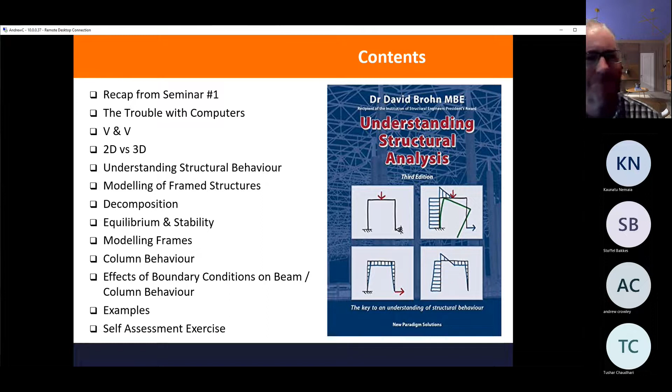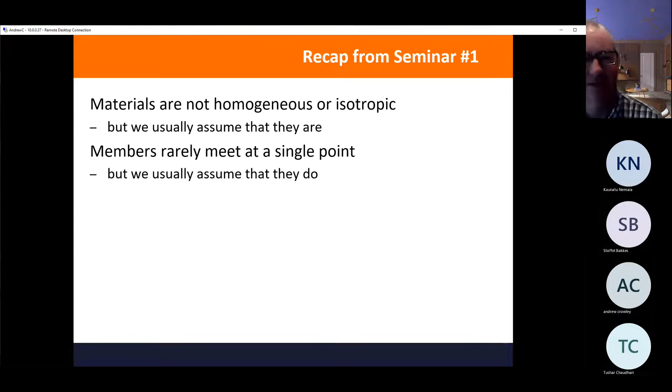So, reminder of seminar number 1. Don't forget that materials are not homogeneous nor isotropic, but we usually assume that they are. Members rarely meet at a single point, but we usually assume that they do, particularly for analysis purposes. Loads rarely apply uniformly, but we usually assume that they do.

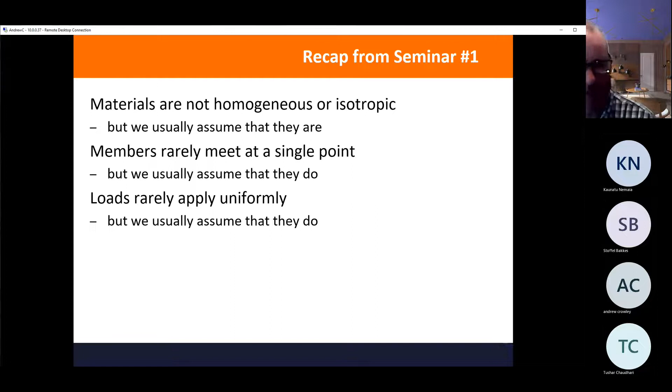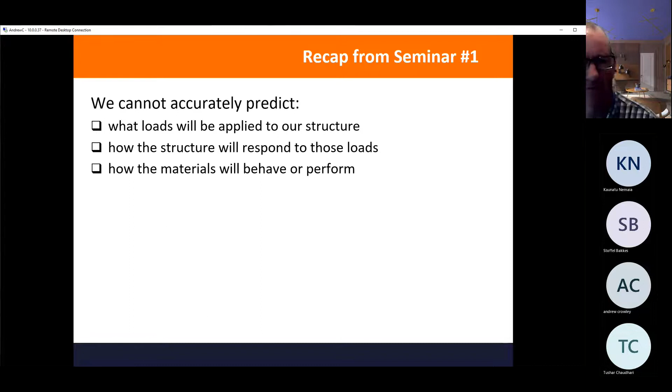So we cannot predict with any real accuracy what loads are going to be applied to our structure, how the structure will respond to those loads, how the materials will behave or perform. So we use a simplified representation, i.e. a model, for analysis and design.

So when we're doing structural assessments on existing buildings, engineering judgment plays an even bigger role than in new design, because half the time you don't know what you've got and you don't know what you're dealing with. You've got to make some judgment, some, shall we say, assumptions.

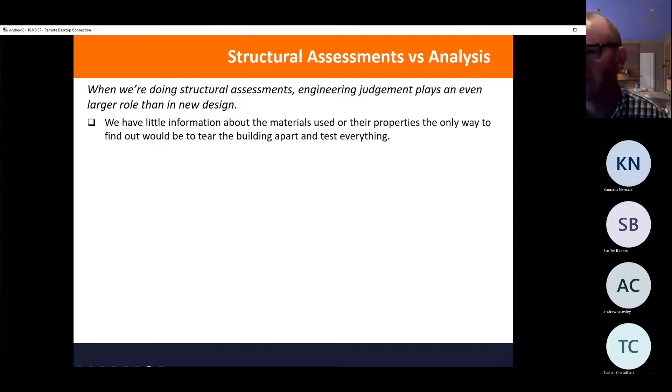So usually when you're looking at an existing building, and we'll get into this in a future lecture, we have little information about the material properties that we used. So we may have to test the material properties, and it's quite difficult to tear the building apart once it's been built.

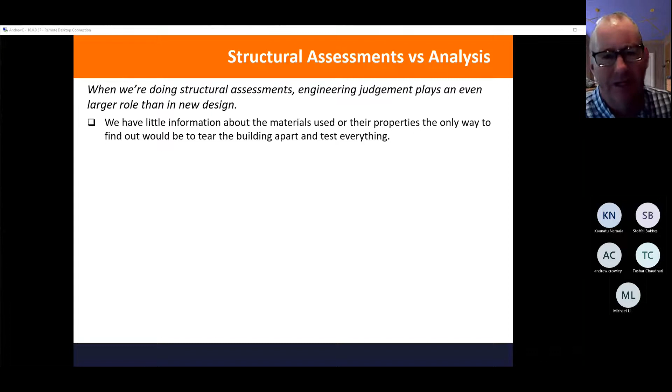So different engineers will come up with different solutions depending on their approach. As a rule, if one approach gives twice the capacity of the other, one of those approaches might be wrong. Now, generally, engineers err on the side of caution and normally take a conservative approach, especially when it comes to existing buildings. So that's where the deviation may come. But if there's a massive difference, an order of magnitude difference, then there's something incorrect in one of their approaches to the assessment.

So it's not an exact science, especially seismic assessments. But the trouble is, all those magic numbers make those analyses look scientific. So even response spectrum and time history analysis, they're all approximations and they use simplifying assumptions.

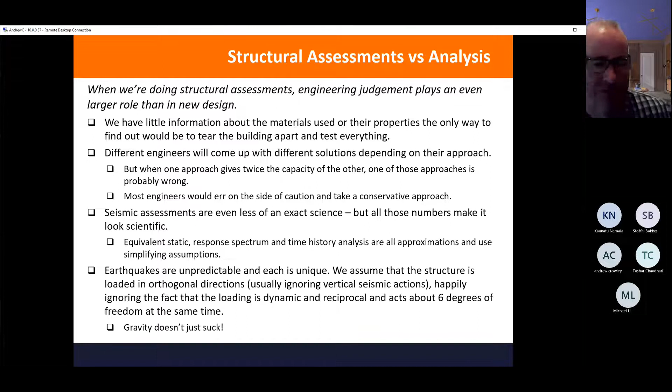And don't forget that earthquakes are unpredictable and each earthquake is unique. We assume that the structure is loaded in an orthogonal direction, usually ignoring the vertical seismic actions, happily ignoring the fact that the load is dynamic and it's reciprocal and acts about 6 degrees of freedom at the same time. So it's a bit like gravity acting in six directions at once, and that gets very complicated and variable.

So what's wrong with computers? Well, the trouble is the people using the computer don't necessarily have enough structural engineering knowledge to carry out the task they've been given. It's often a graduate who's plonked straight onto a computer with a piece of software they don't really know much about, to assess a task they don't really know much about.

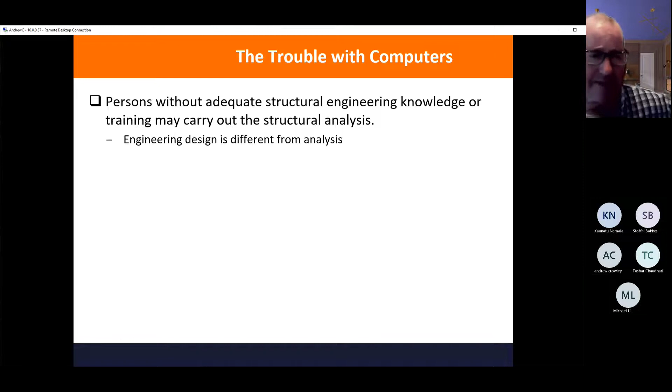So don't forget, engineering design is very different from analysis. The other downside of computers is there could be quite a difference between what the originator of the program intended and what the designer who's using the program is actually trying to do.

So always keep in mind, are you analyzing the right thing? Is the program being used out of context or beyond its scope? Don't forget, every piece of software has scope, and it has limitations to its scope. And sometimes some of them will not tell you that it's being used out of scope. The good ones will.

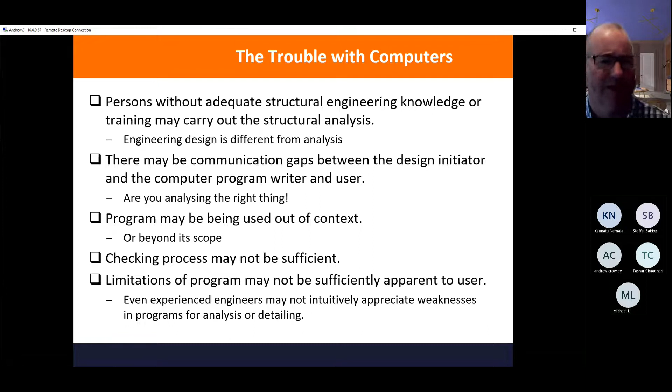And the checking process is very difficult. Sometimes when you're presented with a whole pile of computer output, it's very difficult to tell whether it's actually correct or not, and it's not obvious for a user, even an experienced user. They may not see the weaknesses in that program. And believe me, every computer software will have weaknesses in the analysis, in the way it's been programmed, and the way information is contained, processed, and represented as analysis results.

So I'm going to borrow from David Braun again. He stood up at an international conference, being the man he is, and said what engineers really need is a crap detector. So when you're presented with a whole heap of output from a computer, you've always got to be able to look at it and go, no, that's a load of crap.

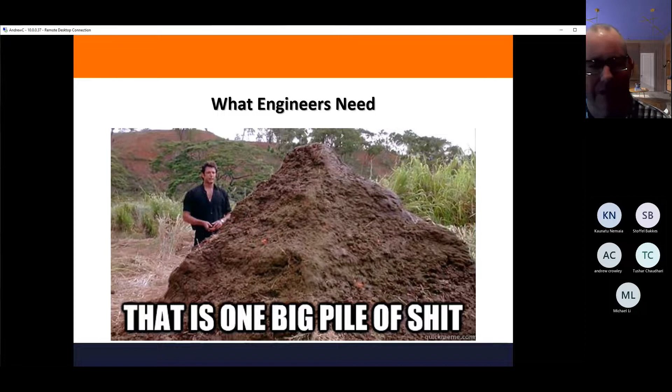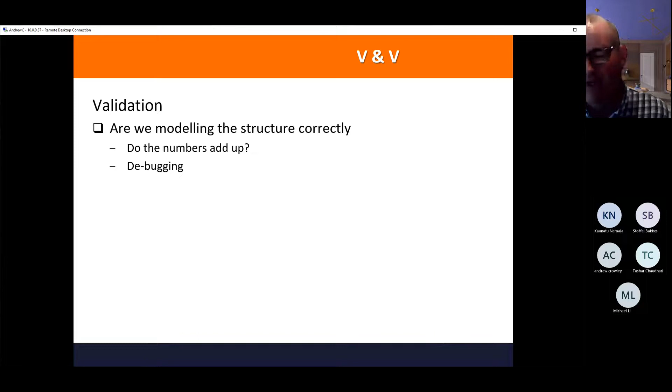And there's two sides of this computer thing. One is validation - are we modeling the structure correctly? Do the numbers add up? Has it been debugged properly? And then the other side is verification - are we modeling the correct structure? Are the nodes and elements used in the analysis really representative of the connections and members in the structure? Are the restraints representative of the real boundary conditions?

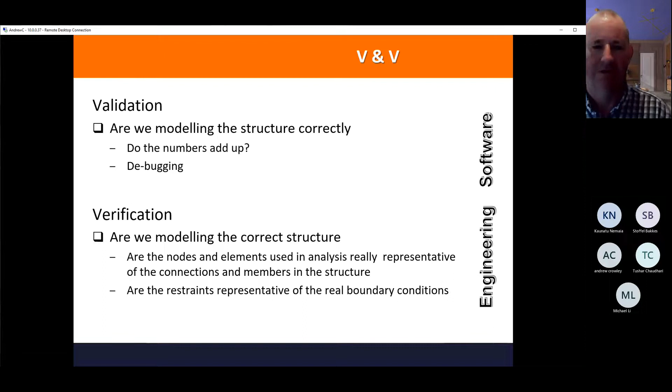So we'll come on to that. There's imaginary boundary conditions, and there's real boundary conditions, and then there's what we analyze and represent in the computer. So the validation part is down to the software engineer, but the other half is really down to the structural engineer in this case.

A little word about two-dimensional analysis versus three-dimensional analysis. Now, an awful lot of frames, particularly ones we're dealing with on a day-to-day basis, could be adequately analyzed in 2 dimensions, based on the simple concept that most buildings are rectangular. So the obvious advantage is that 2D modeling is much simpler than 3D modeling, much quicker to generate your model, and much easier to interpret the results.

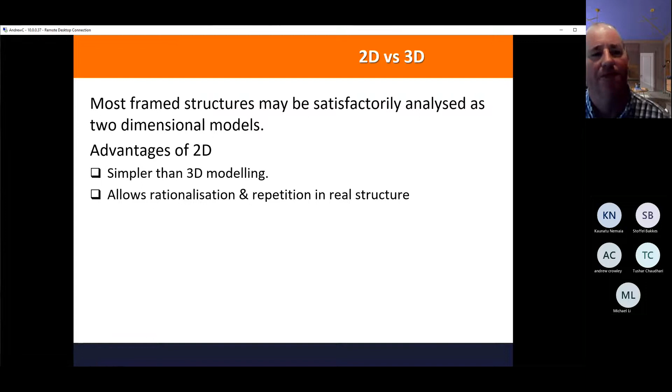It allows rationalization and repetition in the real structure. So if you are simplifying a structure, you can repeat it and repeat it again, and that's where economy comes into your building. It also means that you have economy in your design process.

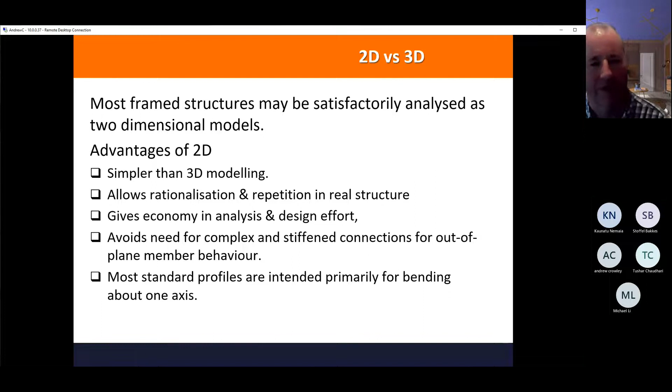Yeah, don't forget about out-of-plane behavior. So if you're analyzing your two-dimensional portal frame, it also needs to be restrained out of plane. And then if you suddenly model it in 3 dimensions, you'll find there are torsional effects you've forgotten about, and out-of-plane behavior that you've forgotten about as well. Most standard profiles, particularly steel profiles, are intended primarily for bending about one axis. So an I-beam is designed to be a floor beam - it's an I shape, and it's primarily designed to be bent about its major axis.

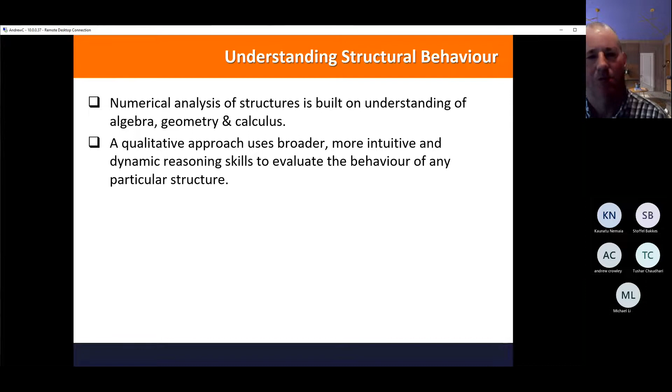So we come on to understanding structural behavior. It goes back to geometry, calculus, and algebra, if you remember all that. A qualitative approach uses a much broader, more intuitive, and dynamic reasoning to evaluate the behavior of any particular structure. So what are the key principles in understanding this?

Well, you need to consider the deformed shape of the structure - how is it going to behave under load? To reduce complex structures into statically determinate simple structures, from which the true structure may be rebuilt. You're probably aware that statically indeterminate structures are actually quite difficult to understand, and doing numerical methods by hand for statically indeterminate structures is long and laborious. The advance of computers means it's relatively quick and simple these days.

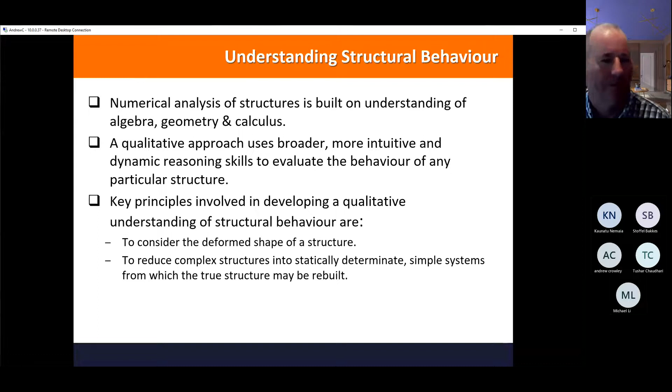But once you've got the output from the computer, you need to know what it really means. So one aspect is consider the structural form, particularly in two directions at least. What are the primary structural elements? How do you put the main frame together? These are going to be transferring the horizontal and vertical loads to the foundations.

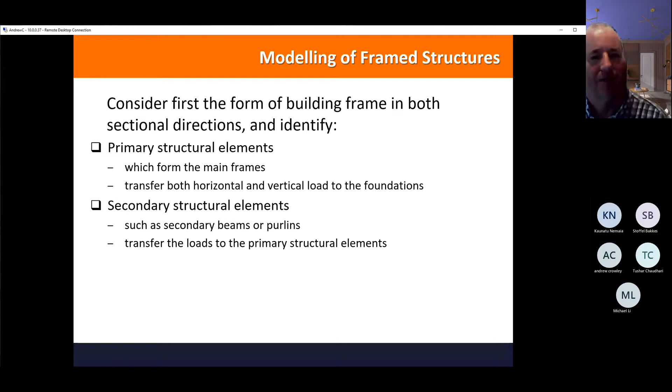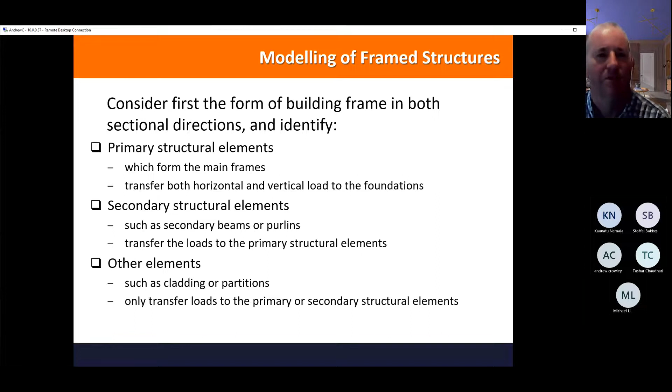But those primary structural elements carry secondary structural elements, such as secondary beams and purlins, girts, cladding, and so on. They transfer the load from the outside to those primary structural elements. Then there's other elements such as the cladding itself and partitions, and those are really only transferring loads to the primary and secondary structural elements as well. So this is where you begin to decompose the structure.

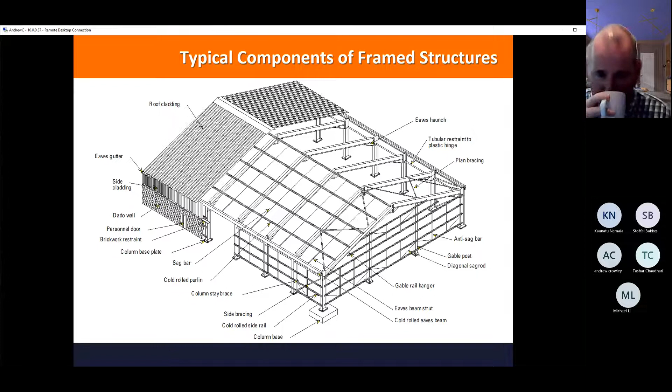So you can take a complete building and chop it up into primary and secondary elements, and then you can, from that, derive your primary members and generate frames for analysis. In some cases, elements will be represented as loads that are imposed on your primary members.

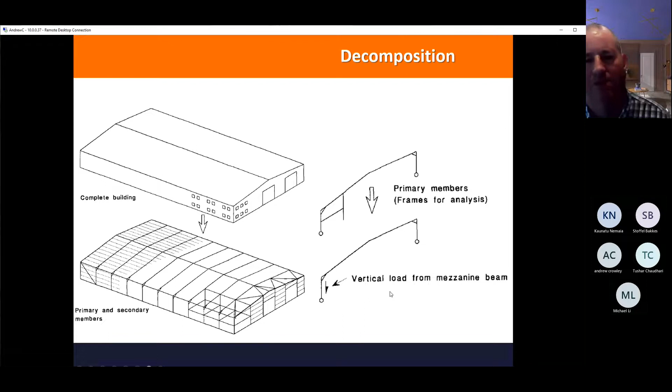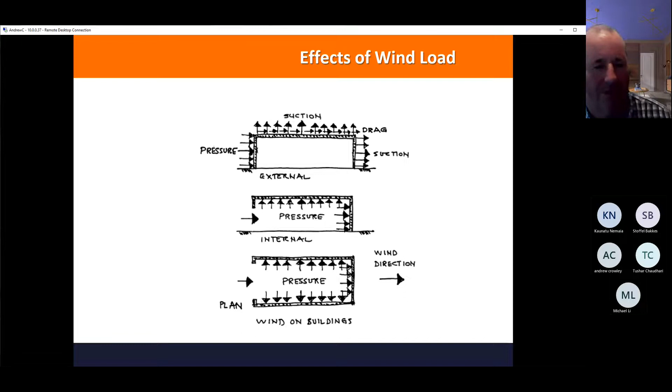Okay, don't forget the effects of wind. Obviously, that's going to be one of the load cases you've got to consider in all directions. Generally, we'll consider it in the along direction and the across direction as well. But thanks to symmetry, we can simplify the analysis to that. I'll be coming back to wind analysis and how you derive wind loads for 1170 in a later seminar.

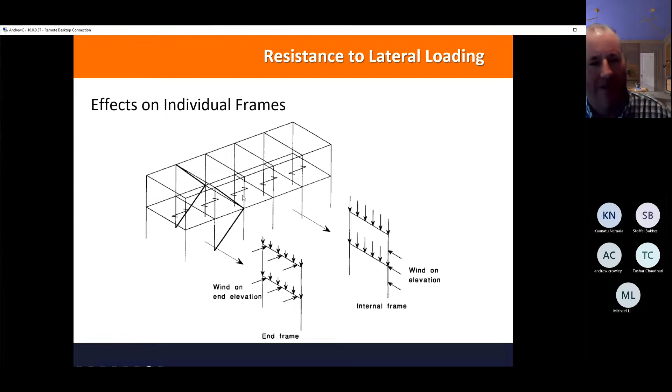And where does the resistance to lateral loading come from? Well, these are your frames. You've got portal action in the across direction, in the transverse direction, and then you've got bracing here in your longitudinal direction. So you need to consider both. You also need to consider how it gets from the end wall to your bracing. Effectively, you're making a little truss there with your bracing.

Some hints as to things to consider. Obviously, you need to consider stability. So there's an overall equilibrium to consider in a building. And so tall, slender buildings are more likely to be unstable than short, squat buildings.

And then you can derive simple models for some of your elements. In a basic sense, vertical loads, you've got gravity coming down, it's got to get into your ground, your foundations. Your structure is in between and your structure is carrying that load and dispersing it down to the foundations. Similarly with the lateral load, you've got to take it from the walls and take it down either bracing or shear walls and take it down into the foundations and thereby into the ground.

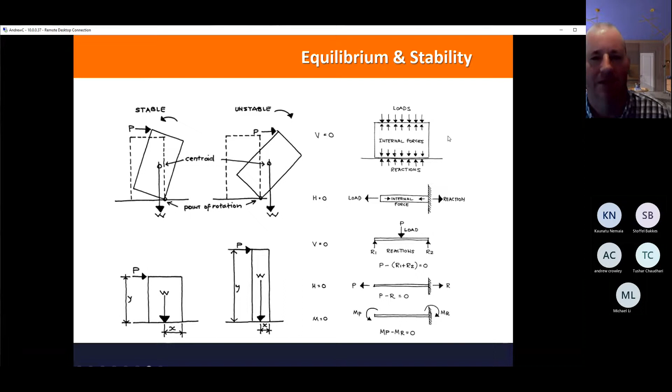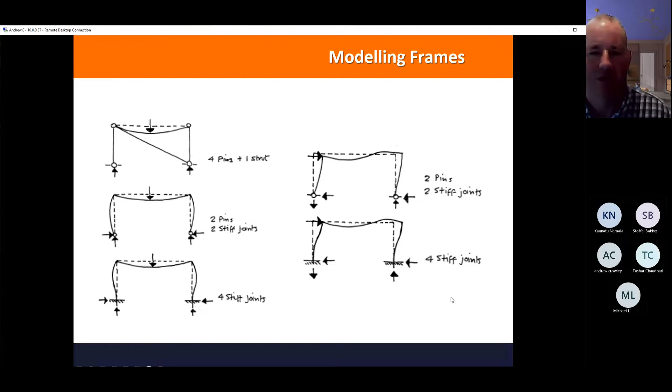Slender columns. So your slender column will be governed by the geometry rather than the material strength of the component of that column. And so you're looking at buckling, and you're looking at Euler buckling for that. Similarly with short or squat columns, the capacity will depend on the material properties more than the geometry.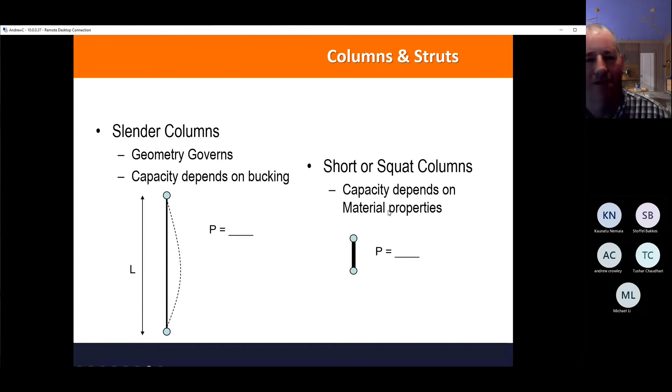So what about these boundary conditions? Well, they're supports, they're restraints. And so the simplest case is a simply supported beam, you've got pin ends. Increasing stiffness, if we build in the ends, you can increase the stiffness, but of course you're transferring bending moments into your supports. And looking over the columns, again, pin-ended, it's going to have the longest effective length of, if you've got 2 ends.

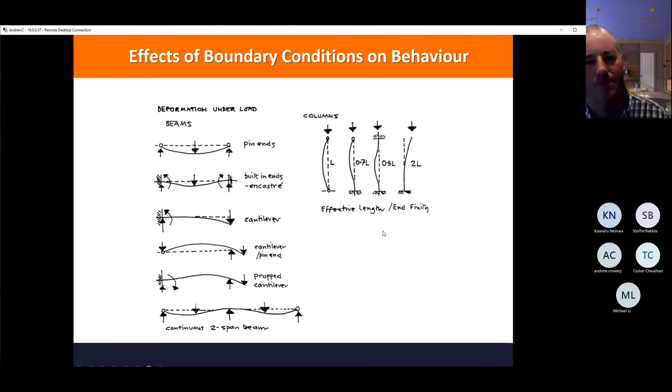The longest effective length will, of course, be a cantilever. In simple terms, the codes will give you slightly different values for those numbers in terms of effective length factors, depending on the material. They don't always go for a cantilever as being 2L, but it's basically like half a simply supported beam. And so the technique of qualitative structural analysis, and this you will need if you're going to approach the homework.

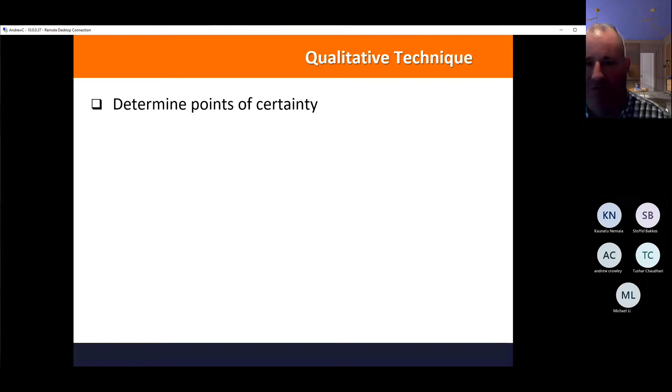So the first step is to determine the points of certainty - which points stay in the same place, and which points are most likely to move under loads. Consider the movement under the loads, and draw the direction of the support reactions. Sometimes it's fairly easy, sometimes it's a bit more complicated because of the shape of the frame and the direction of the loading. So consider the rotation at the supports. Obviously if it's fixed, you will have no rotation at the support of the member connecting to that fixed support.

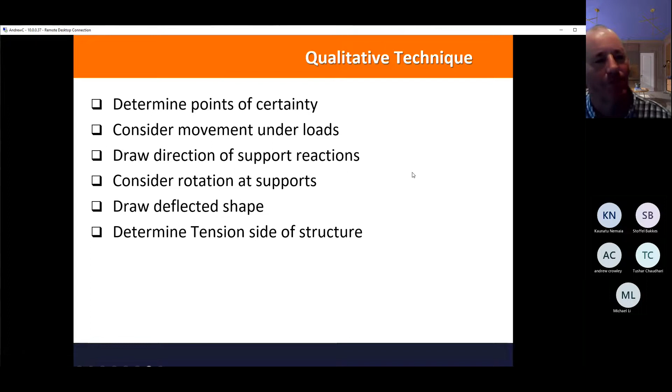Draw the deflected shape based upon all of those points. Determine the tension side of the structure and draw the shape of the bending moment diagram on the tension side of the structure. That is a typical convention, to draw the bending moment as positive on the tension side. Other engineers do it the other way around as well, but it makes a bit more sense if you do it on the tension side. We'll see a bit later.

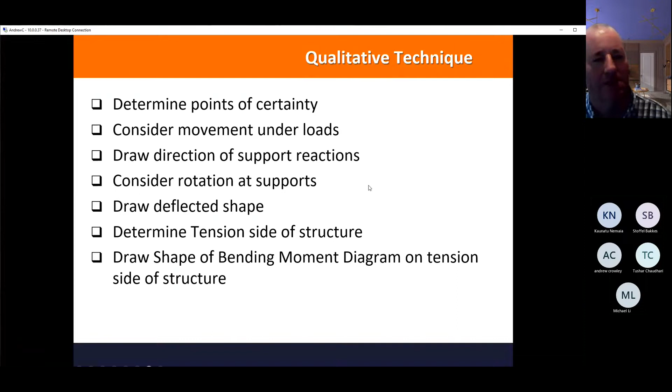So here's your first example. It's simply a small frame with two elements and a built-in support. This is a rigid joint, and this is free. We've got two loads, one vertical going down and one horizontal going across.

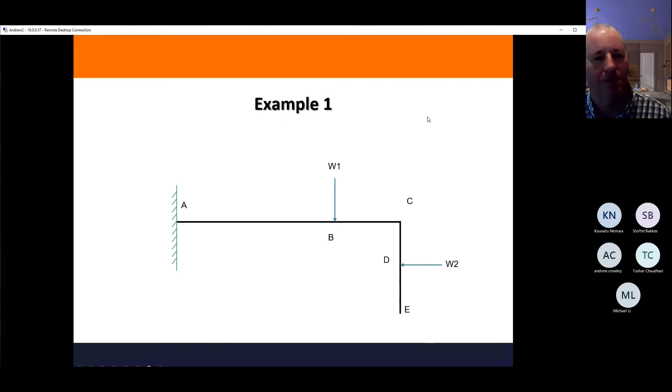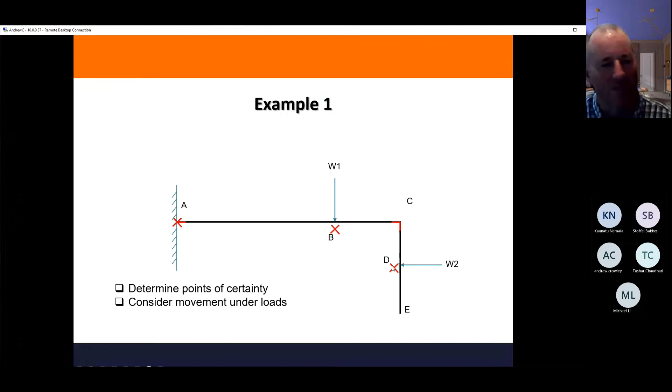So where are the points of certainty? We've got a point of certainty there, that's the support. Chances are the load will go down at point B, so therefore the frame will go down at that point. And because you've got a load coming in from the side, point D is likely to come in as well.

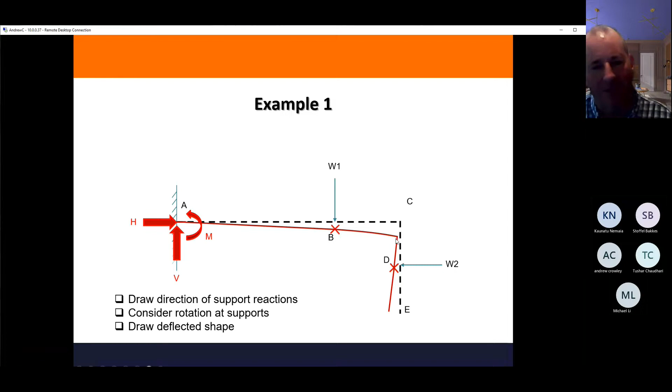Draw the deflected shape. So we've got the reactions in - a vertical reaction due to the vertical load, and a horizontal reaction due to the horizontal load. And because you've got a rigid support, you'll have a moment there. So join the dots, basically, and you can draw a deflected shape as shown in red.

So we draw the tension side of the structure. In this case, tension, tension, tension, all down there. And then you can draw the bending moment diagram on the tension side of the structure. So this is your first point of reference.

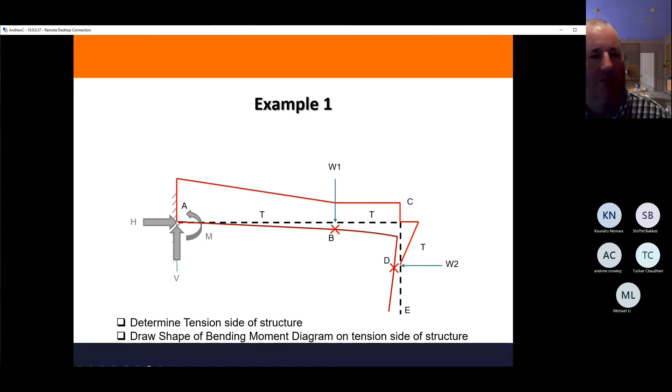Here is a point, that's a little cantilever. Your moment will be zero there, and it will be bigger than zero here. That then flips around to the next stage. There is no load between there and there, so the moment stays constant. We've now got a load, so the moment increases as we get to the support. So the moment is a maximum at the support.

Example 2, a simple frame with a column and a beam. The column has a rigid base and the beam is on rollers.

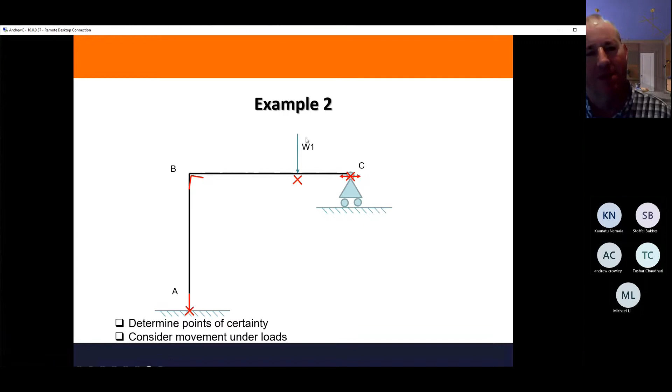So the points of certainty - at point A, that's staying where it is, not moving. The load is likely to push the beam down. Now C is a bit more complicated - it can't go up and down, but because the beam is moving, the roller is either going to go to the left or to the right. And because we've got a rigid joint there, that is likely to rotate because of this load coming down.

So we draw the deflected shape and add on the reactions. And again, don't forget, we've got a rigid base, so we've got a moment. The reason it's a bit hard to grasp at first - why does the roller go to the right? Simply because this load goes down, and that load will push it down that way. That load is pushing or pulling section B inwards.

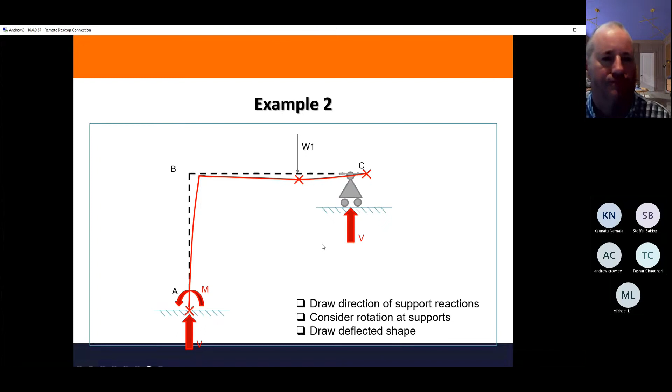So which is the tension side of the structure? Well, we can see it here - again, it's on the top, on the side, and we've got some tension underneath. Let's draw the bending moment diagram.

So you've got basically a propped cantilever with a rigid joint at this end and a prop at this end. You've got the sagging moment due to the load, and then you've got the reaction moment here as well. Obviously this is a pin, therefore the moment is zero. There's no other interaction here, so that flips around to the other side. There's no other load down here, so this is straight. And because this is straight, you're looking at single curvature.

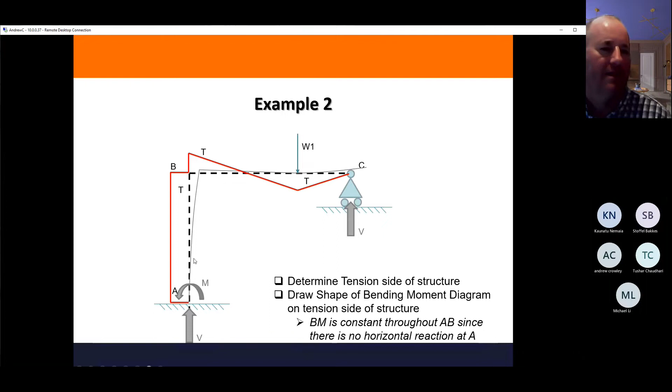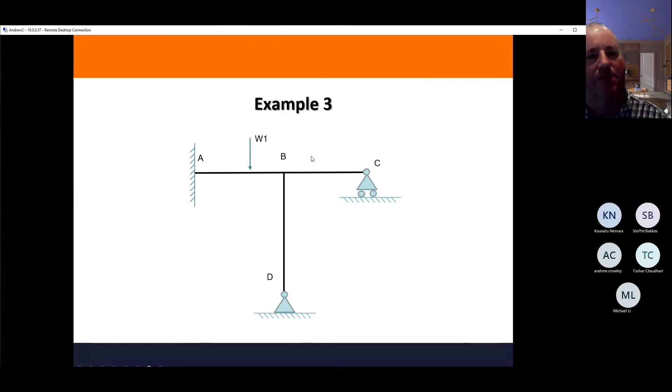Slightly more complicated example 3. Again, two beams and a column - one pin-based support, one roller support, and one rigid support. So what do we do? Well, we need to look at the points of certainty. So the support is a point of certainty.

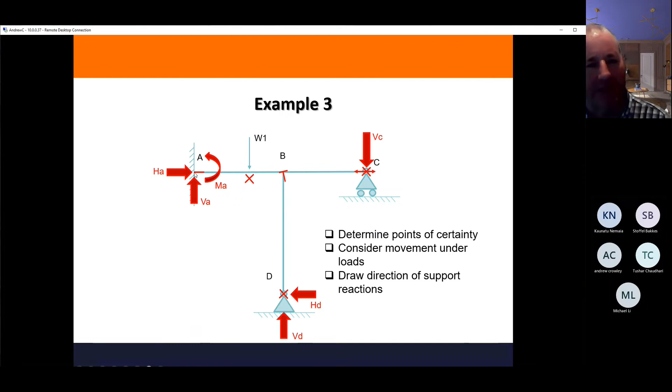The load moves downwards, as it should do. Again, the roller support will either go to the left or to the right. We're not quite sure which yet, but it's not going to go down or up. And the other point of certainty is down here at the support.

So where's the rotation? Well, because of the load here, that is wanting to bend down in there. And because that bends down, this effectively bends up. And because this effectively has a reaction here, this pulls this beam back down again. And the whole of that is turning B. Because that turns B, this column bows out this way because of that.

Obviously the deformations are exaggerated here, so that's why we can draw the deflected shape in that direction.

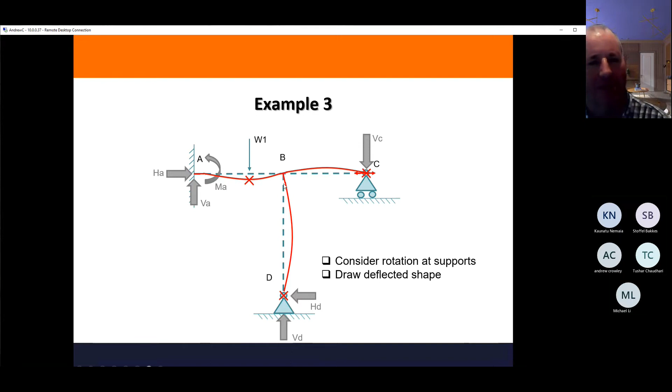So determine the tension side. The tension is going to be on the underside, under the load because of the sagging, and then on the upper side next to the support because of the hogging.

Now here's a funny thing. There is no load between there and there until you get there, so therefore that is linear and coming down to zero. Because it's a pin support, pin on a roller, the moment has to be zero. Similarly, this is a pin support, so the moment has to be zero. So the combination of that and that will equal that.

Now we can argue, and it will be dependent on the stiffness of the beam to the column, how much each takes. But this is the driver of that moment, and that relative stiffness of the beam and the column will determine the distribution of the moment to each.

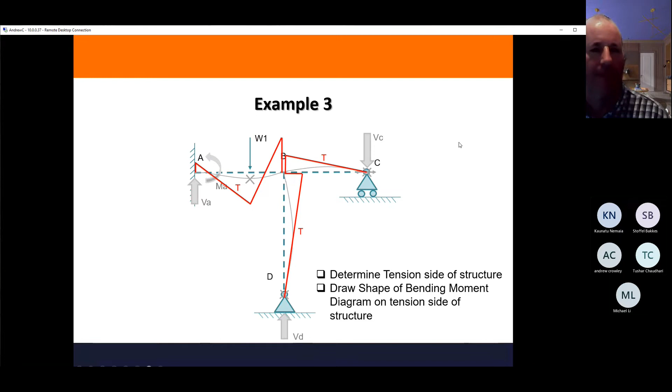Okay, now a little tricky one. Example 4. It's a continuous beam, but we've got a moment applied. Now, this is the case where you have a stair sat on a beam, a secondary beam, and the secondary beam is then suspended on a longitudinal primary beam.

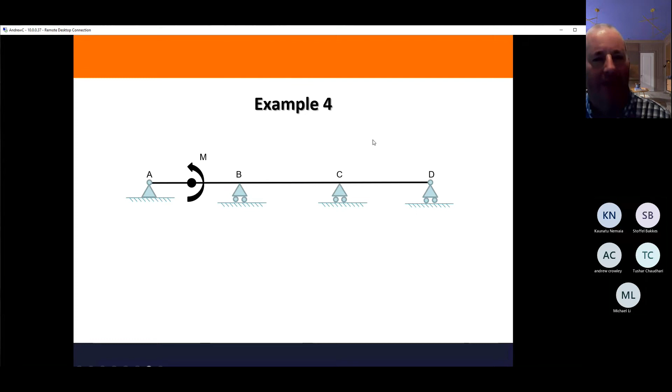So consider the points of certainty. Obviously the supports, A, B, C, D. Now, only A is fixed, so B, C, and D can move side to side, but not up and down.

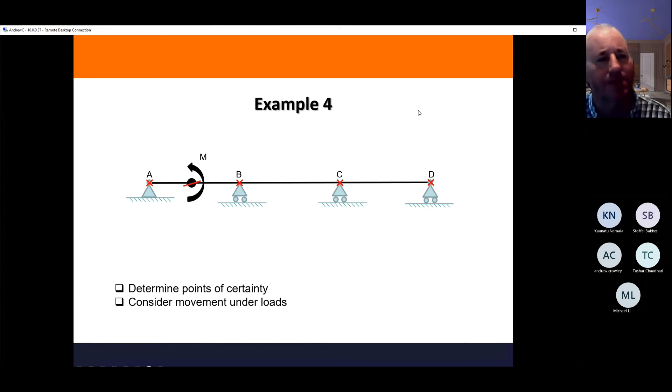Now we consider the movement of the structure under the load. So what's going to happen? What you're doing is you're applying a turning force here. So that little blob is going to rotate anti-clockwise, which means the beam is going to be deflecting down. But you've got a reaction here pushing it back up to meet this support. And similarly, you have a reaction here pulling it down to meet that support.

Okay, so far so good. Then what happens? Well, there's no other loads applied, there's only reactions. So you've got the two vertical reactions here because this wants to come down, but this is pushing it back up. And similarly, this is heading on up until it gets pushed down by the reaction here as well.

So all of these need to be in equilibrium, so the vertical downward reactions match the vertical upward reactions. So from that, we've got our starting points for the deflected shape, and then we draw the deflected shape.

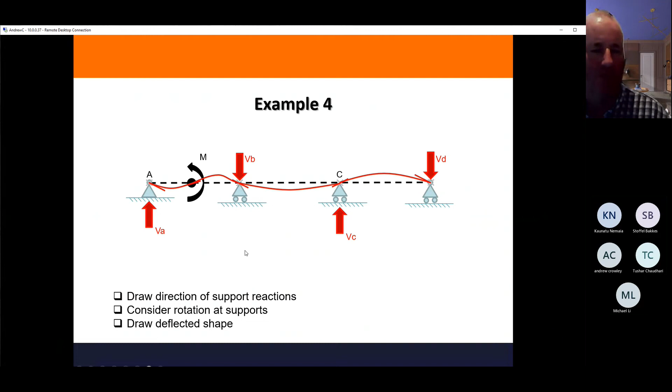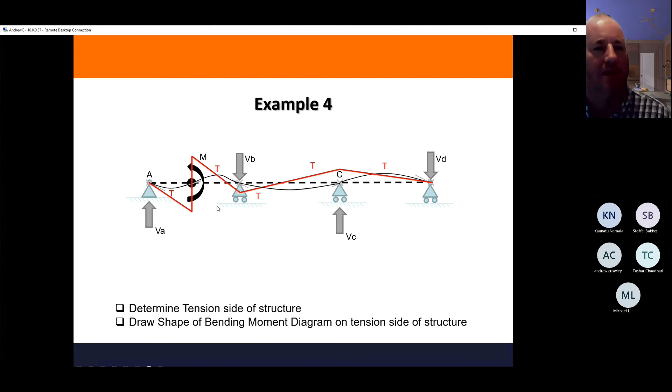And then we put on the tension side, and then we can put on the bending moment diagram. So the big one is here, that's where the moment is applied, and then that's distributed. Now, if this was a pin, it'd be zero, but it's not a pin, it's continuous. So this is like a continuous beam with a cantilever edge, if you like, and that's picking up this reaction.

And because you've got a reaction here and a reaction here, that is putting in effectively double curvature bending. And then we're back to single curvature bending as well. So here we've got double curvature bending, then we have single curvature bending one way, and then single curvature bending the other way.

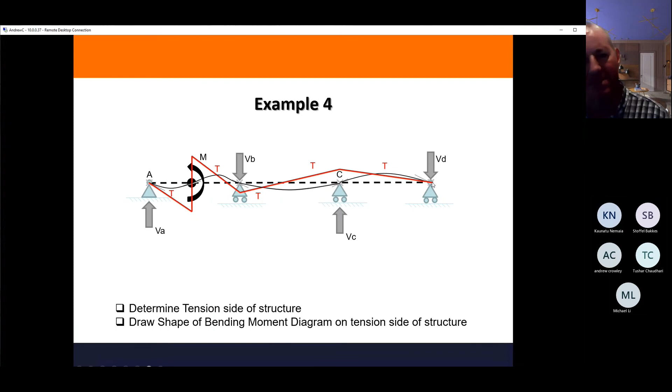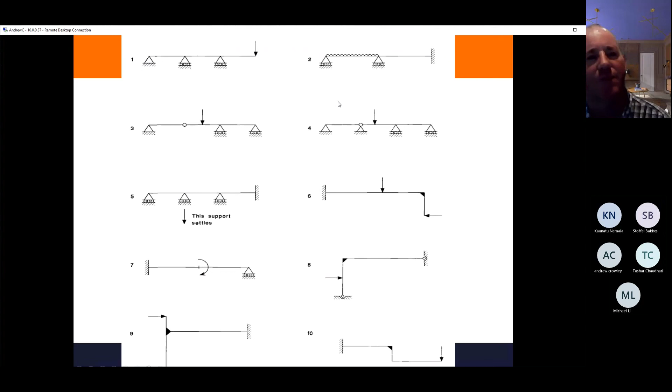So the self-assessment exercise, there are 20 questions. Number 4 you may spot, and number 8 you may spot. The first 10 are beams, and then the second 10 are frames.